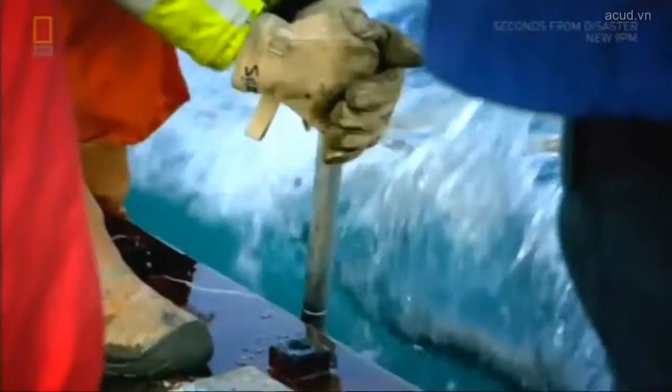Your next vacation may be spent in a paradise you've never heard of. You'll just need a way to get there. Here's the catch. That way has to go underwater. It would become the deepest immersed highway on Earth. Oh, they also have to build a couple of bridges. And did we mention the typhoons?

These tugs are towing a contradiction. A tunnel segment that's both colossal and fragile. Come back, close. You slow down. A raft of techno breakthroughs and untested results. Bound for a place few know, to entice the world to visit. And even sway the choice for the Olympic Games.

Busan is South Korea's second largest city. 4.2 million people. Bigger than Madrid, closing in on Milan, and as hectic as Manhattan. South Korea is an Asian tiger, and Busan makes it roar. Its skyline will soon include one of the world's tallest buildings.

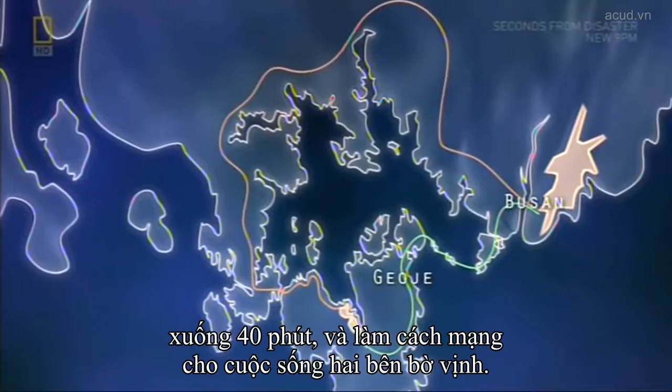The solution will slash travel time from nearly half a workday to 40 minutes and revolutionize life on both sides of the bay. The Busan-Geoje Fixed Link. A 4-lane highway that runs nearly 50 meters beneath the sea. Then it leaps across 2 colossal cable-stayed bridges. Altogether, longer than 80 football pitches. One of the biggest infrastructure projects in the world.

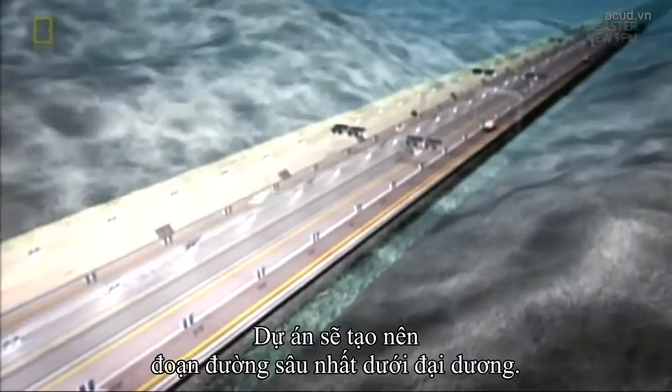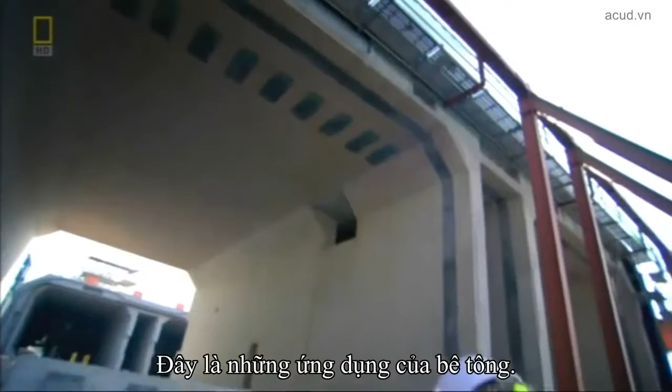Plunging 48 meters below sea level, the link will boast the deepest immersed roadway in the world. The tunnel will be composed of 18 mammoth segments, each as long as 2 football pitches and as heavy as an aircraft carrier. Wide enough to carry 2 lanes of traffic each way, with an access tunnel between. That's the concrete reality. Now, here's where it gets dicey.

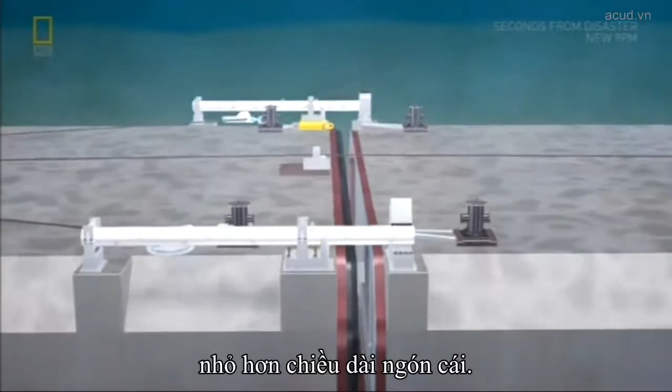Each segment has to be carefully towed into position, then carefully sunk to the seabed. And all the segments have to align within 35 millimeters, less than a thumb's width. Weather adds its own demands. This site is exposed to the open sea. There are always high waves, and the water is deep as well.

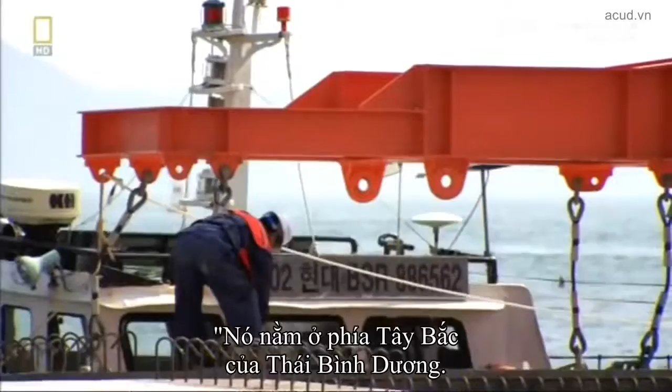It is wide open to the Northwest Pacific Ocean, so we have extreme exposure conditions for the construction period. So we've got to be ready for whatever that sends us, like big swell waves, strong winds, and even the occasional typhoon. Building a tunnel like none ever seen will take techniques like none ever tried.

Yet the Koreans have never built an immersed tunnel. But this country has. The Dutch have 5 centuries of experience at holding back the sea.

Afzinken van tunnels. Tunnel immersion is actually a Dutch speciality.

If you look at the number of immersed tunnels in the world, most of them are in the Netherlands.

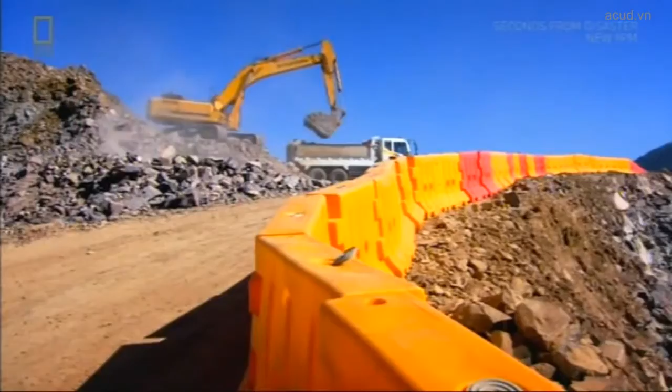Construction begins with the tunnel entrances. One on Gadeok Island, the other near an uninhabited island. From here, engineers will dig down to 12 meters below sea level to meet up with the undersea tunnel segments. But they won't tunnel through the seabed itself. If they did, the gradient would be too steep for driving. Instead, Peter's crew will lay prefabricated tunnel segments on the seabed.

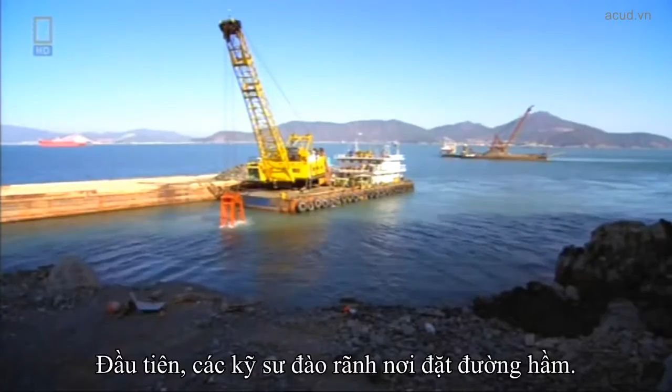First, engineers dredge a trench where the tunnel will rest. To buttress the foundation, they bore concrete columns into the seabed, stopping 3 meters shy of bedrock. The reason? Earthquakes. Avoiding bedrock will give the tunnel crucial flexibility. The segments will rest on a bed of gravel to ensure an even surface.

Because the bed determines the exact height of each tunnel segment, the gravel must be placed with pinpoint accuracy. Later, the entire tunnel will be covered with thousands of tons of crushed rocks to protect it from collisions with ships or anchors.

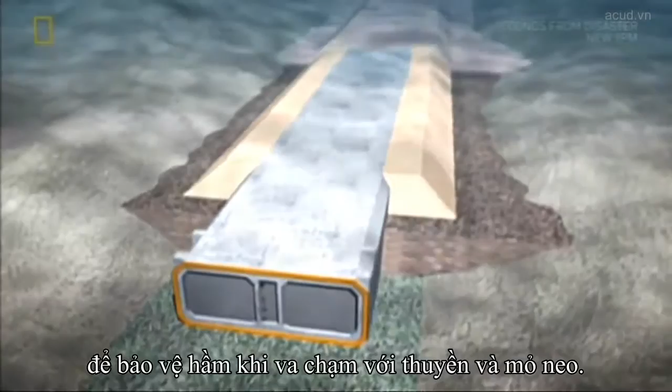Because the tunnel segments will be prefabricated, the first challenge is finding land for a construction yard. Not an easy task in Busan. If you look around, there's not a single metre of flat land anywhere that a contractor can use as a base for the construction period. From the tunnel site, the closest spot lies 35 kilometres away. It's big enough to build up to 5 tunnel segments at a time.

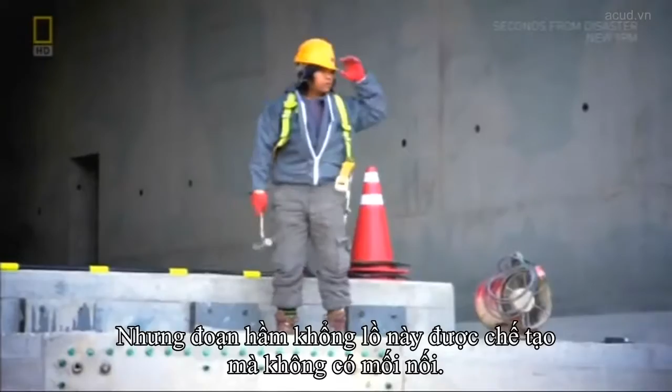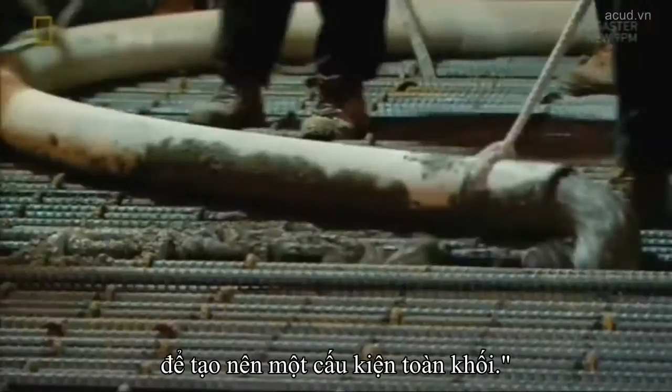Each segment weighs about 48,000 tonnes and is made of 8 subsections, each twice as long as a London bus. Anyone with a basement knows water can penetrate concrete joints, potentially disastrous in an underwater tunnel. But each giant section is cast without a single joint, thanks to Korean ingenuity. We continuously poured full sections from the ground up to the top of the walls to eliminate gaps in the walls. A process lasting 24 hours.

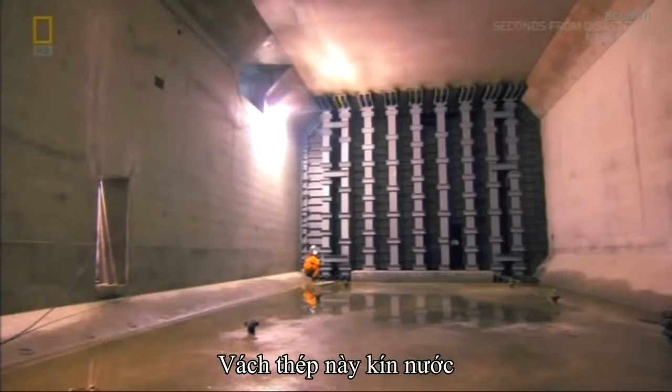After casting, the ends are sealed with steel bulkheads, a Dutch innovation best appreciated later on the bottom of Jinhae Bay. The bulkheads are watertight because these babies are about to take a bath. Flooding the dry dock will allow them to float the segments out to sea. The inundation of the dock takes approximately 48 hours.

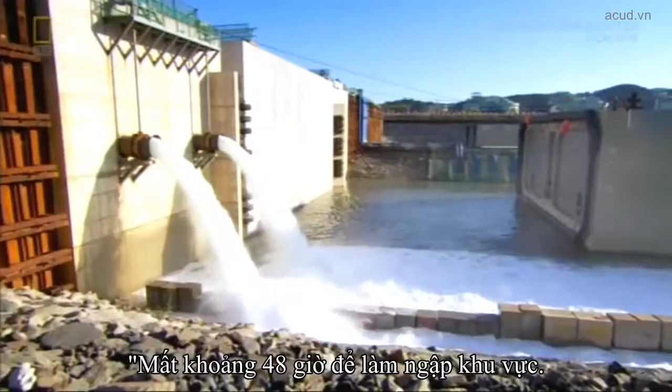During the first phase, we let in water until it reaches the level of the bulkhead door. Then we'll check to see if the bulkheads are leaking. Once all the leaks are repaired, or if there are no leaks, we'll fill up the dock completely. It's enough water to fill 230 Olympic pools.

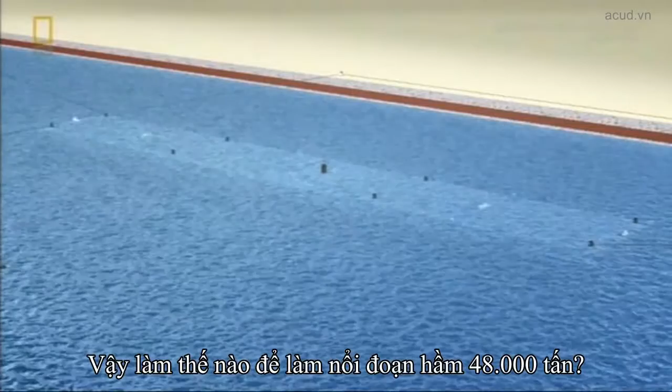So how do you prep 48,000 tons of dead weight to float? Inside every tunnel segment, there are 6 ballast tanks, and they're filled with water.

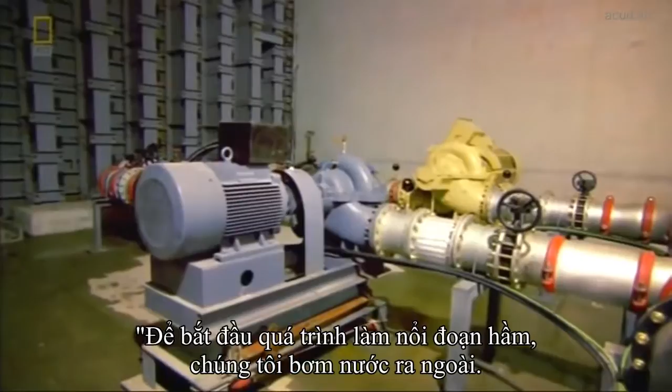To start the flotation process, we begin pumping out the water. We continue until the tunnel segment starts floating. So what the tugboat has to do is to tow that slow. Then with the other winches at the backside, we control the tunnel element sideways direction. Now they can begin to warp out the segment.

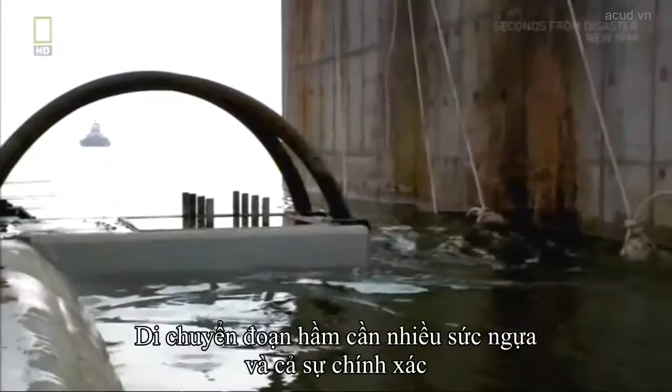Removing the first segment takes brawn and finesse to avoid colliding with the dry dock. With barely 2 meters on each side, there's no room for error.

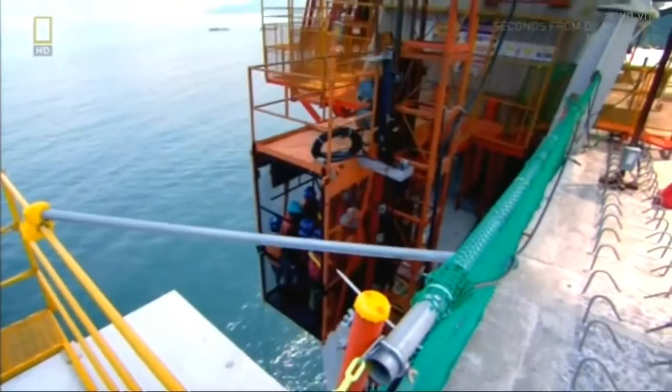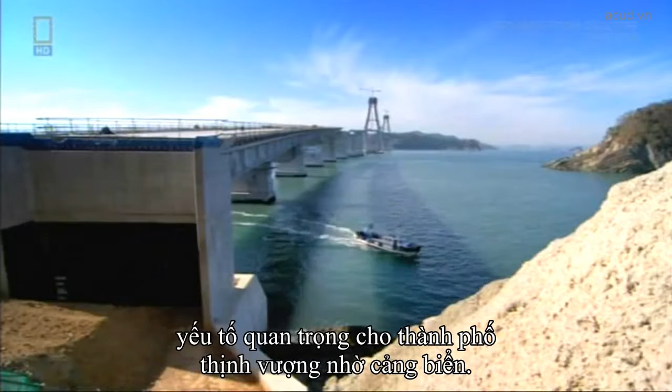At its topmost, the 2-pylon bridge will soar 156 meters above sea level, the height of a 50-story building. The span between the pylons will stretch the length of 5 football pitches, with enough room for the tallest freighters to pass under. Crucial for a city that thrives on shipping for its livelihood.

The most pleasing aspect of the bridge is also the most daunting: its curved diamond shape. Of course, curved pylons are very difficult to construct, but they're very much in harmony with the surrounding scenery in many ways, in that they bear resemblance to a mother's praying hands and to the wings of seagulls.

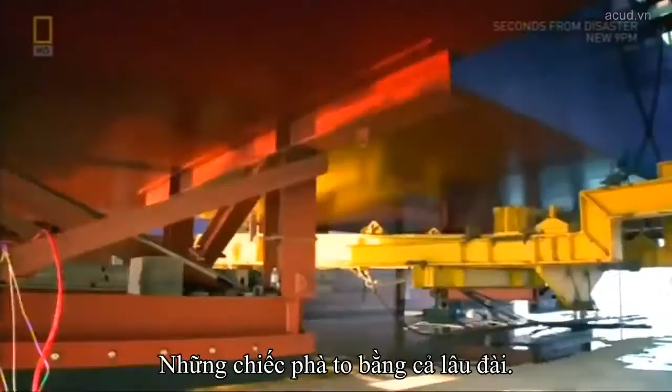35 kilometers away, the first 5 tunnel segments arrive at a temporary mooring site. From here, they'll travel across Jinhae Bay to their resting place on the sea floor, already leveled and lined with gravel. And here's how they'll get there. Pontoons the size of a mansion. Dutch designed, Korean made. One pontoon is positioned near each end of the tunnel segment.

After arrival at the tunnel site, mammoth winches on pontoons will lower the segment to the seabed. At least, that's the theory, because it's never been done in the open sea. A specialist diving team prepares the first tunnel segment for the immersion operation. Divers test connections for data systems and power supplies. Standing by. And remove marine growth from the bulkhead.

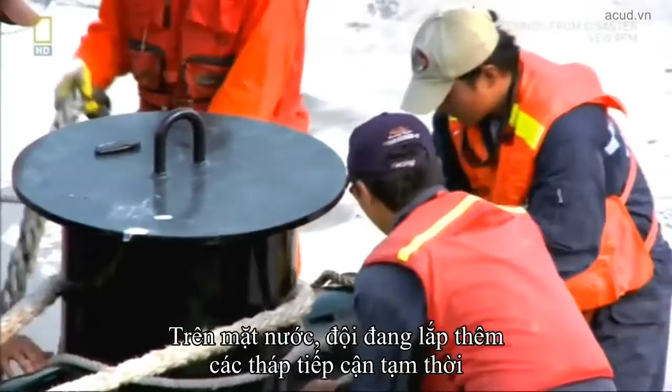Down on the wire, please, Steve. Down on the wire. Finally, they install steel wires underneath the tunnel segment, crucial for positioning during immersion. In a good position now, we can come up on the wire. Coming up on the wire. Above water, the crew are also adding a temporary access tower, so workers can enter the segment in case of trouble with the ballast tanks. Over, the tunnel is cleared.

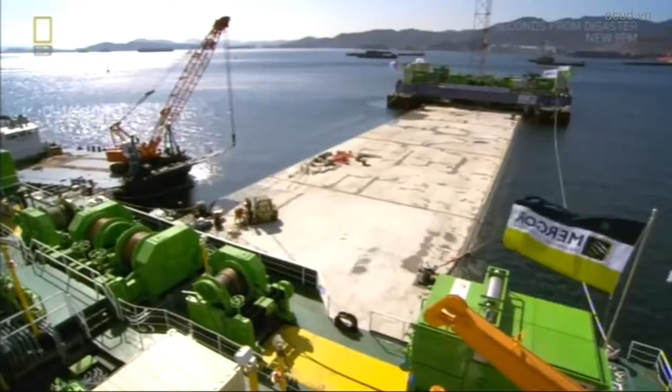Every problem has to be anticipated, because if things go south, they won't get a second chance. What we do doesn't have anything to do with luck. We know what's involved, we know how the process works, and we have the feeling we control the whole process. Not quite. Back in Holland, the rest of the immersion team stands by to fly out. In all, 56 men wait for Peter to say go, and he's waiting for a forecast.

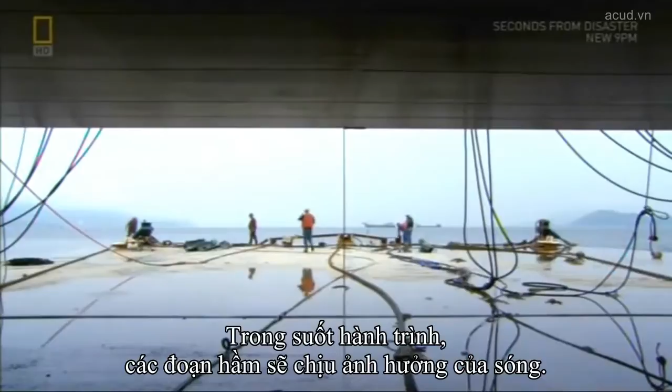When the wind blows from the south, swells roll in from the Pacific. Because we're situated offshore, we have to deal with waves. And these waves can be pretty fierce. Even swells barely 30 centimeters high pack so much force they could fracture the subsections that form the tunnel segment. Throughout its journey, the segment will be at the mercy of the waves, so the team needs 3 days of calm seas.

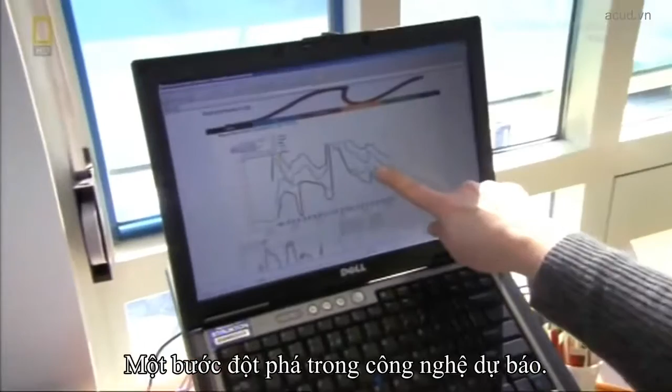Strukton looked around for a forecaster, but few dared to stick out their neck for such a costly guess. Then, a Danish company seized the challenge. They came up with a model to predict waves as small as 10 centimeters, up to 5 days out. A stunning breakthrough in forecasting. That means we're able to say, tomorrow we can do an immersion. And that means we're able to put people on the plane yesterday, really on a last-minute basis. It takes away a big risk for us and for our client.

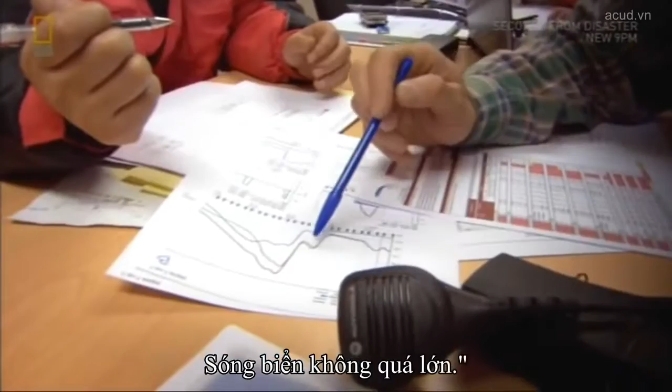We've got the weather. They're all showing the same prediction. The swell still not as bad. I would say we have a go. Green light. We'll try. We'll try, right? Okay, thank you. Yes, bye-bye. Ahead lie 48 hours of tension for the boss. 6 months of work rides on steel threads and a forecaster's guess. Tonight, no one will sleep soundly.

After a cautious voyage at 3 kilometers an hour, the first tunnel segment arrives at Gadeok Island, the starting point of the tunnel. Joining Peter is the elite team fresh from Holland, among the few men on the planet who can do this job.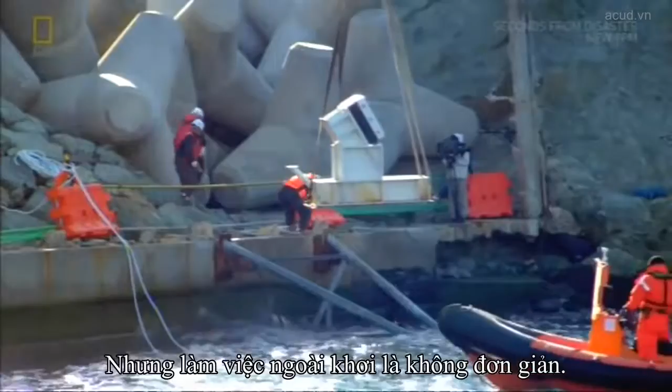But working offshore poses a huge challenge. 48,000 tons have to be maneuvered into a slot with just 1 meter of clearance underwater on each side. One false move and the segment could get jammed in the rocks. Controlling the segment are 14 steel cables, anchored in the rocks and on the seabed.

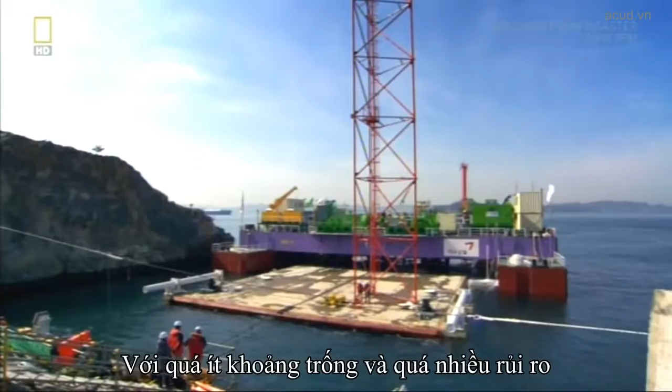Aligning the segment takes painstaking accuracy. Surveyors take readings using a system of prisms and mirrors mounted on the access shaft and the survey tower. It's all new to the Koreans, so it takes time getting used to the technology. The ordeal will take all day and end either with an engineering triumph or a 48,000-ton disaster. With so little clearance and so much at stake, the segment moves at a snail's pace. After a journey of 35 kilometers, it's now just 4 meters from the abutment.

We've worked really hard for a half a year to prepare for this moment. 56 of our people are here to execute this operation. The Koreans are excited and tense because they've never witnessed this. We've done it more often, but still, a very special moment.

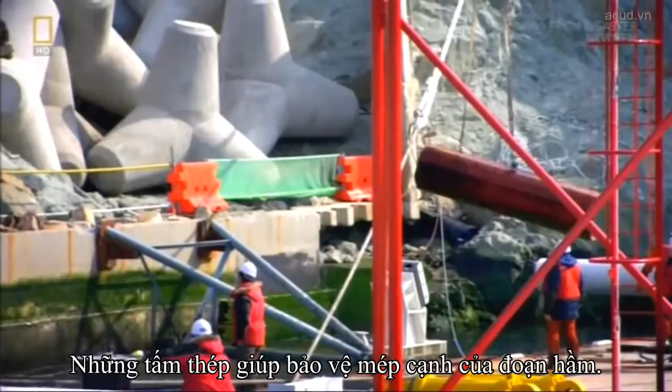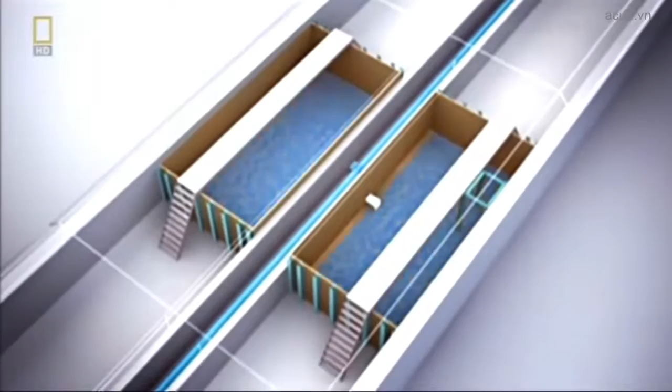Till now, steel plates have protected the leading edge of the segment. Ease down. Behind them is a component as crucial as it is fragile: a rubber gasket to ensure a watertight connection with the abutment. Now they're ready to begin the descent. Operated by remote control, the ballast tanks slowly fill. The command post monitors everything via remote control cameras, on the pontoons and inside the tunnel segment.

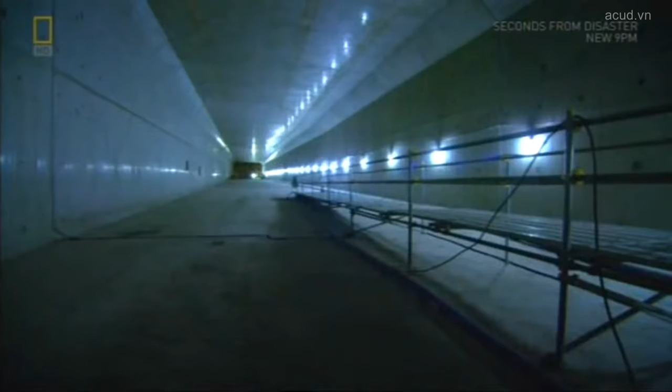7 hours later, touchdown. The segment now rests just 50 centimeters from the abutment, the mouth of the landward tunnel. To close the gap, engineers have installed a pair of powerful hydraulic jacks. Linking the jacks and applying tension closes the gap. The final stage begins from the landward side.

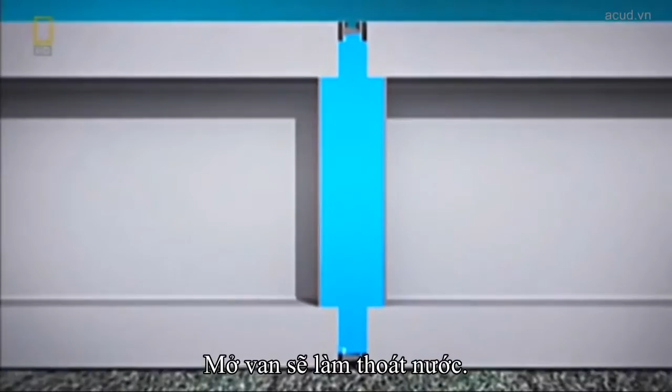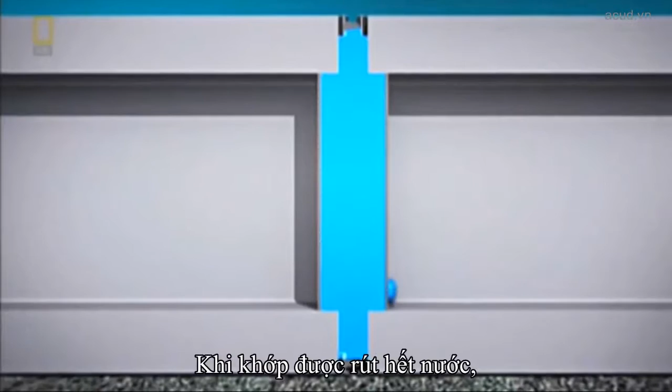A wall of water nearly 3 meters wide separates the segment from the abutment, what they call the immersion joint. Opening this valve will force the water out. As the immersion joint empties, external pressure will further compress the gasket for a watertight seal. The echo from the bulkhead reveals the water level in the joint. With the water drained, they can open the bulkhead door.

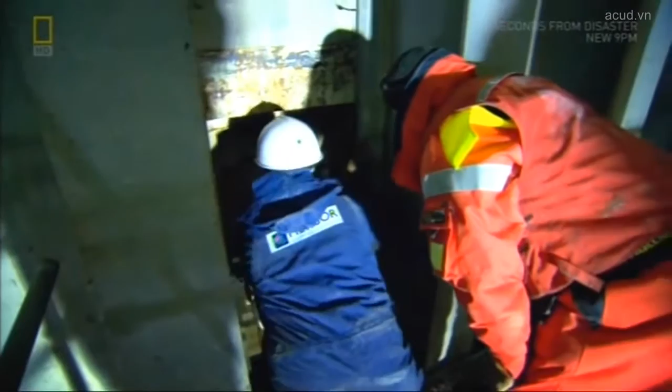But the lock's jammed. You knew that it was going to break? Huh? Did you know that? Because you took your toolbox with you.

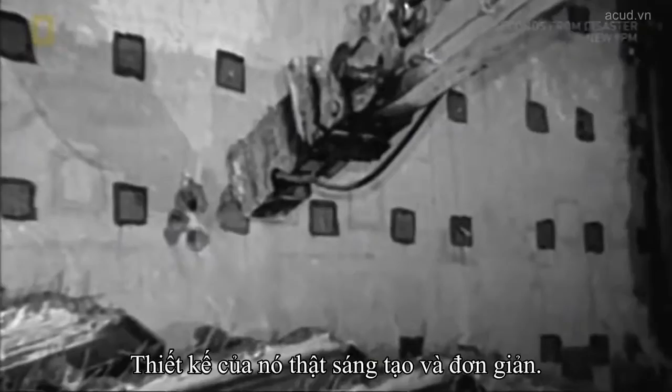This calls for cruder technology. All that stands between the crew and the first immersed segment is the steel wall installed back at the dock. And here is why it's so brilliantly simple. On other tunnels, engineers seal the ends of segments with concrete, then knock it out after immersion. But that takes time and creates debris.

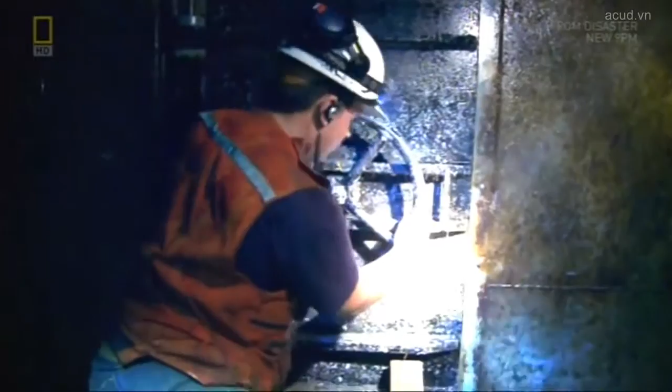The modular steel bulkheads are easy to install, easy to remove, and they'll be reused on every segment and eventually recycled. Faster, cheaper and safer. An engineering trifecta. Finally, open sesame.

Although we experienced some unexpected things, we were very happy that it was completed successfully in the end. And the feeling of accomplishment was indescribable. Congratulations, Mr. Two. Their marathon operation lasted almost 78 hours. Some have gone 2 days without sleep. 1 down, 17 to go. And they won't all go smoothly.

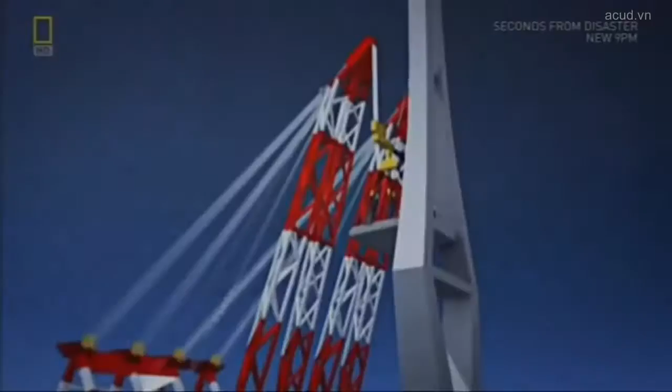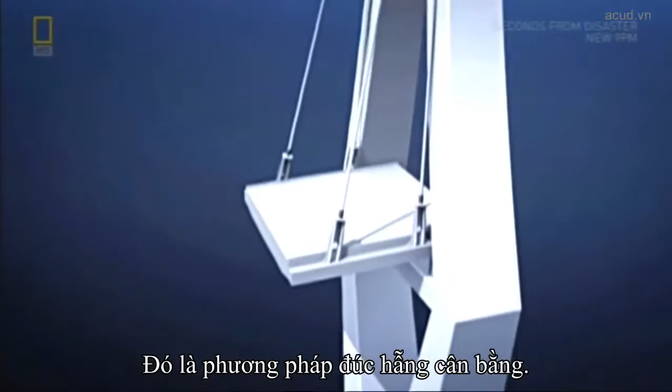Like the Busan Tunnel, the bridges advance in segments, but 2 at a time, not 1. It's called balanced cantilever construction. Working outward, steel segments are laid on each side of the pylon to keep the bridge in balance. Then 2 cables are attached to brace the segments. Once they've done that, the derrick crane then lifts up 6 precast concrete panels and places them onto the steel frame.

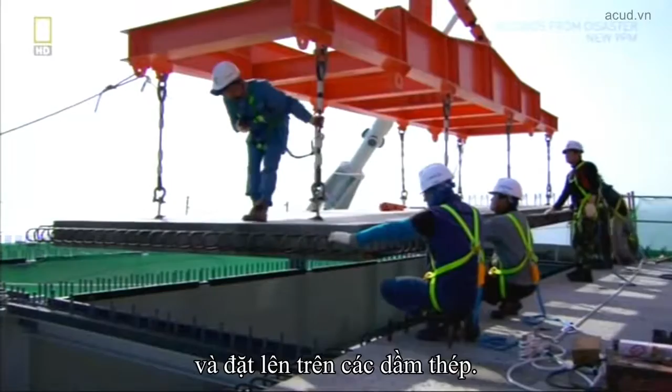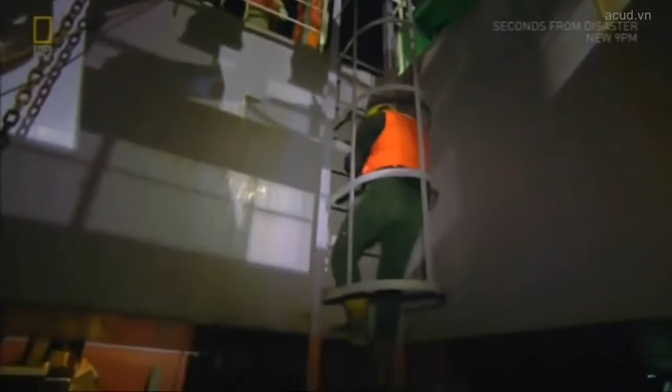Then put a final post-tensioning into the cables. And we're ready then to start the whole thing over again. Back at the tunnel, the team have installed 12 concrete segments. But now they're heading for 48 meters, the deepest water and the hardest challenge.

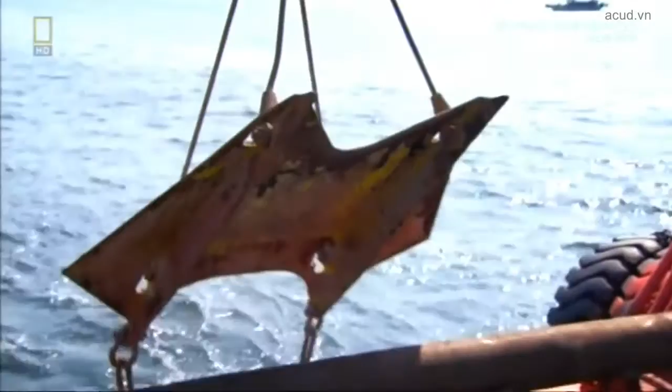The sea floor out here is soft clay, so they need to set anchors that can hold the segment and pontoons fast. Stevmantas, named for their fish-like shape. They're designed to dig in where other anchors lose their grip. Once segment 13 arrives here, 14 steel cables connected to the anchors will hold it in position. But once again, deep water raises the stakes.

Once the segment hits the bottom, suppose a problem arises with the ballast tanks. Somehow, Peter would need to get the engineers inside. On segment 1, they could use an access tower, but not in deep water. The solution is a first in tunnel immersion, a self-propelled diving bell. Purchased in America, the sub was refitted just for this project.

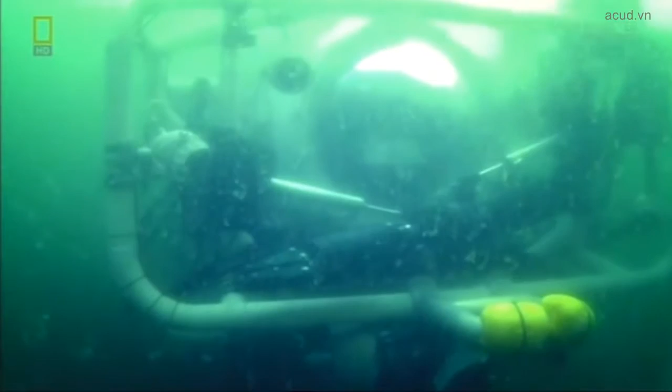I'm coming down to 15 meters, see if we can get the tunnel on sonar. This is the tunnel element here. That's something, probably a bollard on the corner.

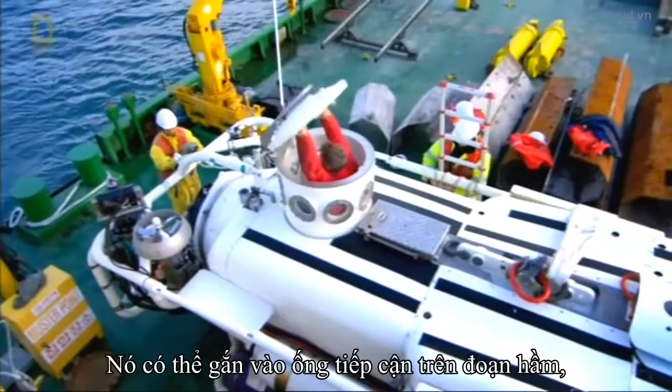With a little boat like this that can go to 300 meters, you've got the concept of a ferry transferring people to the tunnel segment. It's 9 meters long, with room for a pilot, co-pilot, and 5 engineers. It can dock on an access tube on the segment for watertight access to the tunnel.

Deep water poses another problem: monitoring the position of the segment as it's lowered, because one misalignment would be disastrous. To calibrate the position of the first segment, surveyors took readings from prisms mounted on the access tower. But remember, there's no access tower here. So once more, the Dutch devise a smart, simple solution. It's named for what it is.

A taut wire. One end attaches to the leading edge of the segment to be immersed. The other end attaches to the previous segment. The taut wire ensures the connection stays under high tension. Positioning the device is a delicate operation. This custom-made model is the only one in existence. Breaking it is not an option.

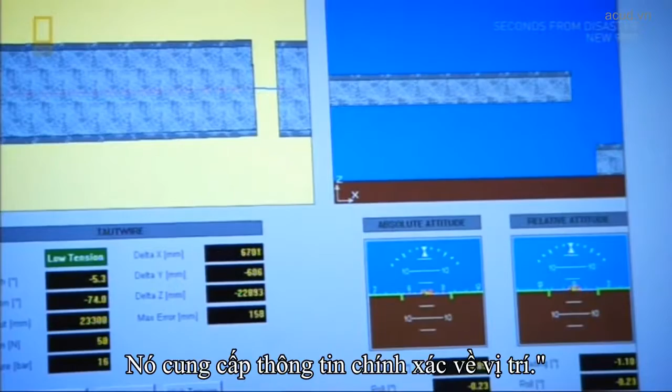When this segment descends, a computer will record the length and angle of the wire, allowing the team to monitor the segment's position. The taut wire is now under high tension between this segment and the previous one. And as the segment descends, the wire automatically retracts and becomes shorter. So that provides us with exact positioning data.

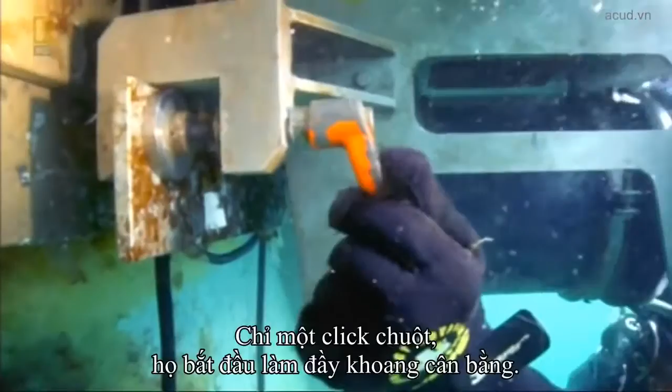To fine-tune the position of the segment on the seabed, 4 of these sensors are attached, one on each corner of the bulkhead. Another custom innovation for this project. And wait till you see how accurate they are. The whole operation is remote controlled from the command unit on the pontoon. With one click, they start filling the ballast tanks.

You can feel the tension building up now. And then we all have one question. Can we do it again? Can we get it in position? It's the same tunnel, but it's farther away from the coast. It's deeper, the weather, everything. So many aspects make it different every time, so you have to stay alert.

All the data feeds into Peter's computer and refreshes the position of the segment every second. This is the tunnel where we have to go to. The green one is the final position, and this is where it is now. So you can see it's just below sea level.

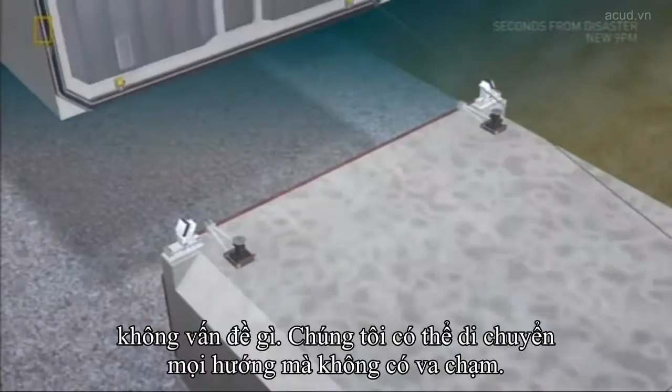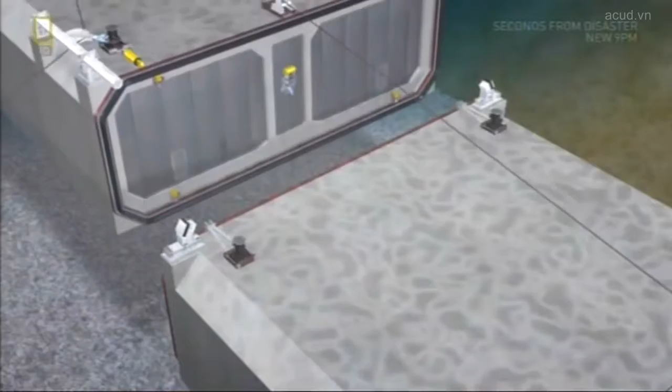The first step in joining the segments poses another challenge and another solution. The moment a tunnel segment approaches the one ahead of it, it's moving because of the swell. So we install 2 guide beams on the top end of the segment. Another simple but elegant solution. The moment we pull them closer together, the guide beams become less flexible. The movement diminishes until the segment is motionless.

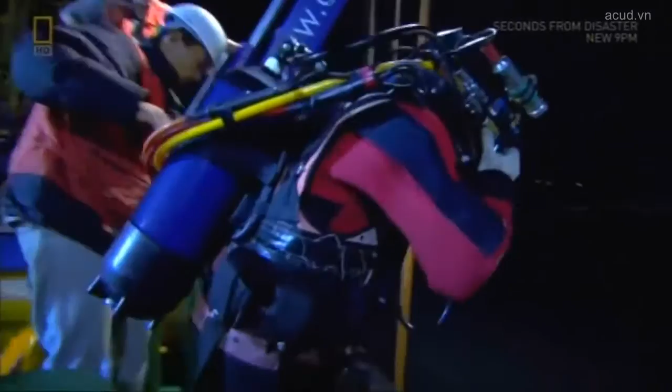With only 50 centimeters separating the segments, and in near zero visibility, a diver connects the hydraulic jacks. The segments seem aligned, yet the slightest error on this end will translate into a big mistake at the other. But the Dutch don't miss a trick.

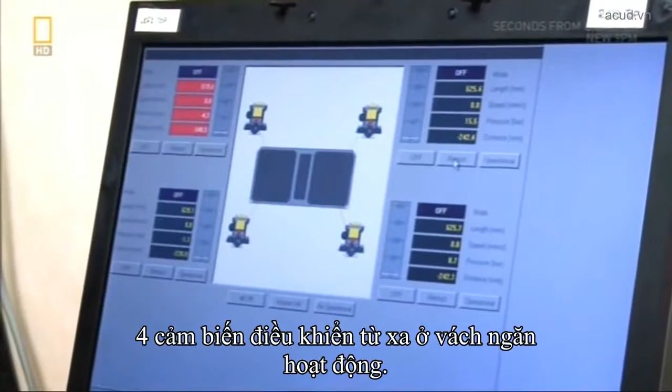The 4 remote-controlled sensors on the bulkhead now deploy. They measure the position of the segment within 1 millimeter, the width of a guitar string, and relay the data back to the command center. Peter needs to shift 48,000 tons of concrete, 20 centimeters to the right. Even on calm days, the swell is so heavy and the segment is so long, stability is a problem.

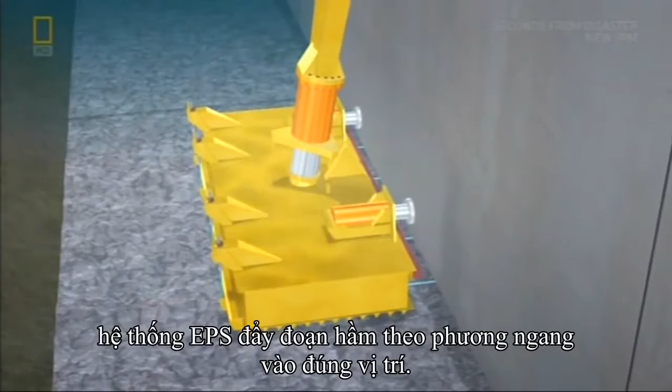The solution? The External Positioning System, or EPS. Yet another Dutch invention based on a simple idea. A pair of hydraulic legs and extendable feet to hold, lift and move the segment. Connecting each pair of legs are 4 steel cables, already installed back at the mooring site. Braced on its robot legs, the EPS laterally aligns the segment into its correct position. Now, the jacks are tightened by remote control, compressing the rubber gasket.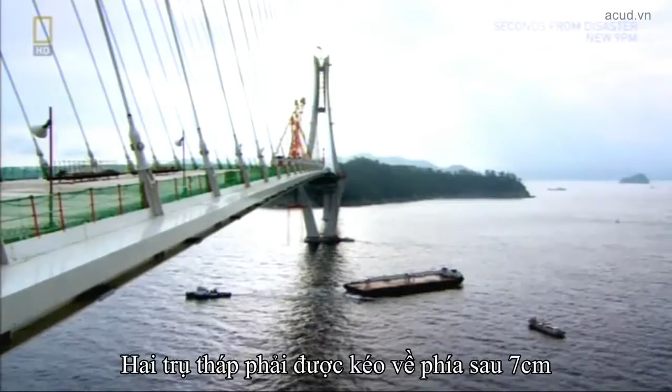Done. One more segment complete. Like the tunnel, the bridges approach the final stages. Before the 2-pylon bridge can accept its last section, engineers have to perform a stretching exercise, as tiny as it is powerful. Both pylons have to be pulled back about 7 centimeters to create enough space for the key section to be placed.

Once the tension is released, the final section will have a tight fit. After 6 years, they must be eager to finish. But just like the tunnel crew, they have to move in baby steps. Because this baby is a giant.

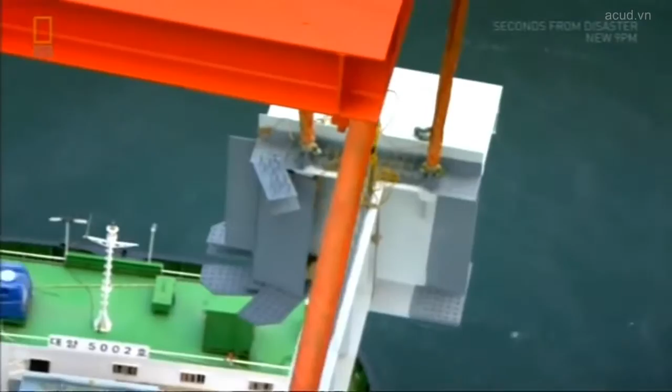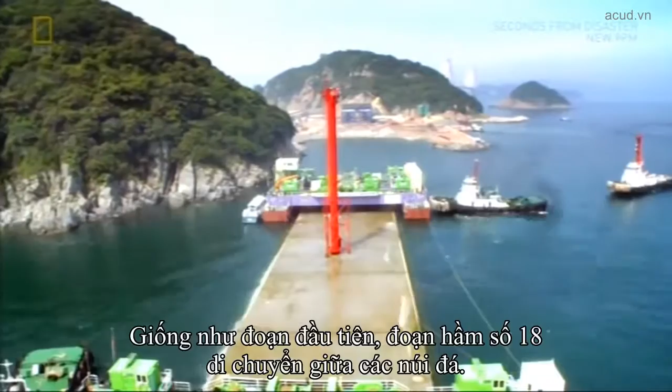A few kilometers away, Peter's crew prepares to install their last segment. Just like the first segment, number 18 has to be maneuvered between rocks. As before, they run some of the anchor lines from the pontoons to the rocks. Because it's so close to the island, it's very difficult to install the immersion wires. Connecting them isn't easy by any means. It's not just a matter of simply pulling them in place.

With all cables attached, they can start maneuvering the segment into place. Because this segment is extremely heavy, we can't afford even a small mistake. Light contact can cause huge damage to the segment, and that kind of damage can set back the entire project. After 3 years, they'll open the last tunnel segment tonight, if all goes well.

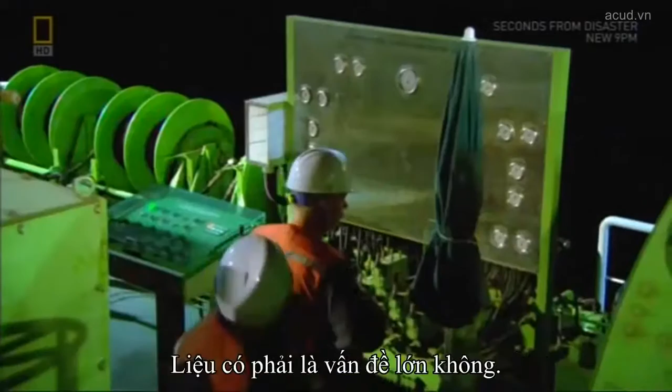The segment hits the bottom, but there's trouble. One end is sitting 28 centimeters too high. We're now trying to figure out what the cause is. We don't know yet. It's a major problem at the moment. We're taking about half an hour to go through all the steps so that we don't miss anything, and then I'll inform you about the situation.

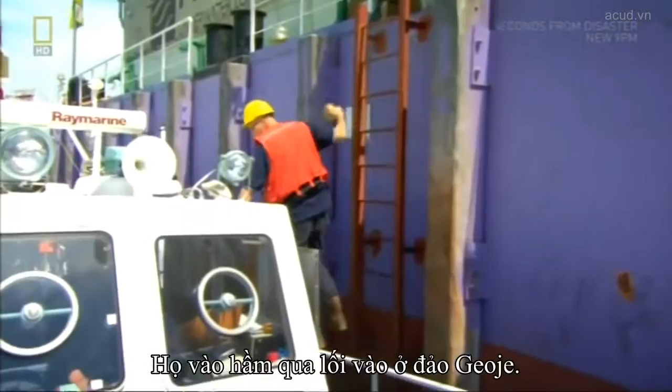The gravel foundation under one of the EPS feet is overbuilt, so they'll have to remove the foot. And the grand opening will have to wait one more day. After final adjustments, the last tunnel segment now sits squarely on the sea floor. All that's left is entering the tunnel to seal the joint with the final segment. They'll enter via the tunnel entrance on Geoje Island. It's the last time Peter will make this trip.

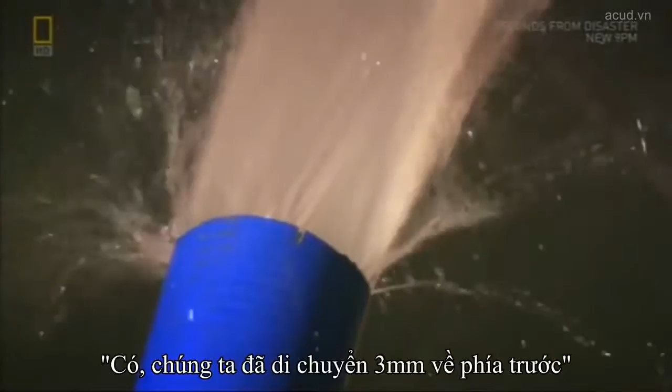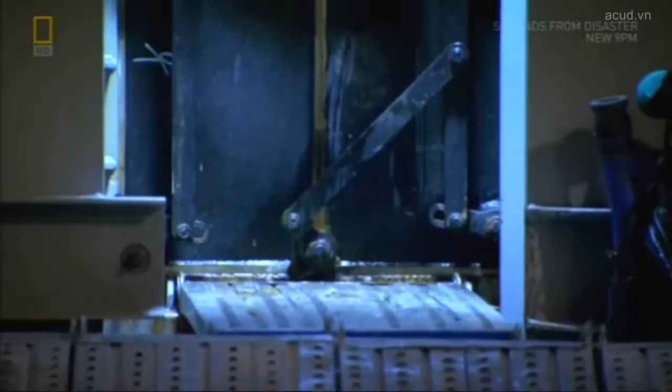They always celebrate this step, but today is the grand finale. Once complete strangers, now firm friends, and soon to go their own way. The end of their long journey lies behind this bulkhead door, and the honor of opening it falls to Peter.

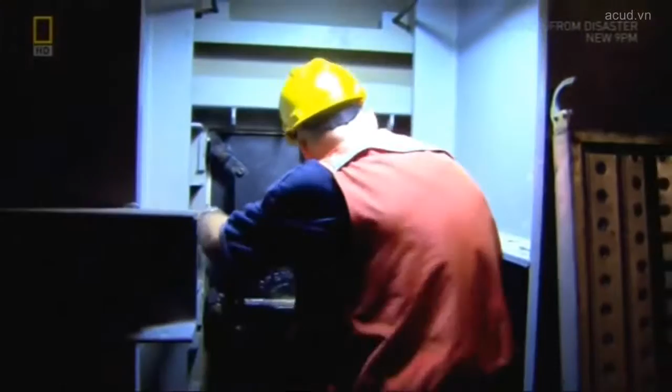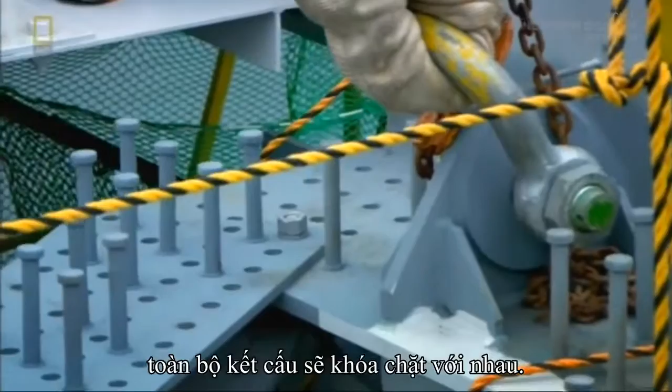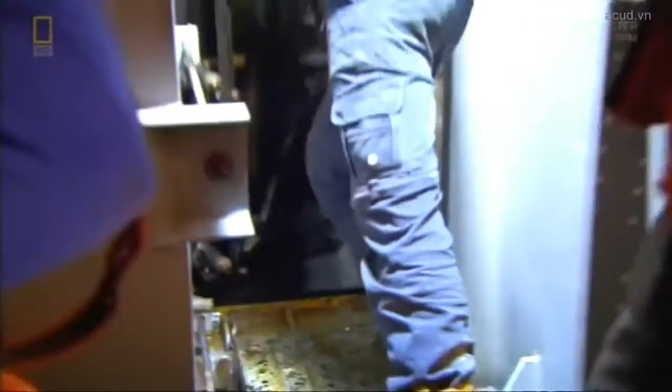Back at the bridge, the final section is lifted into place. Once the tension on the towers is released, the whole structure will be locked in place. With the bridge complete, all that remains is opening the final segment of the tunnel. Last inspection.

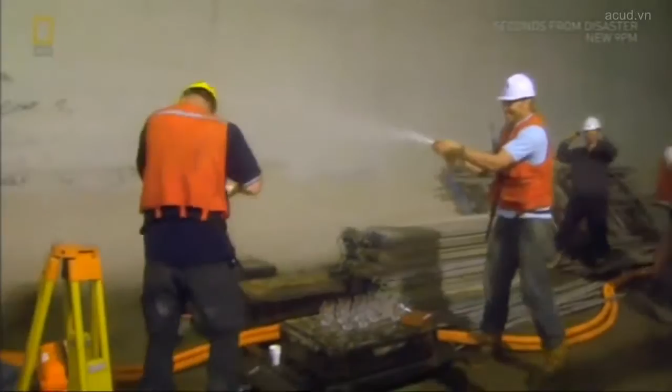Really extremely proud that we did it, and happy, of course. Happy for the whole team. It's just great. After all this time and after a difficult operation, we did it. Very emotional, yes. Fits the moment. And proud. So proud. Yeah.

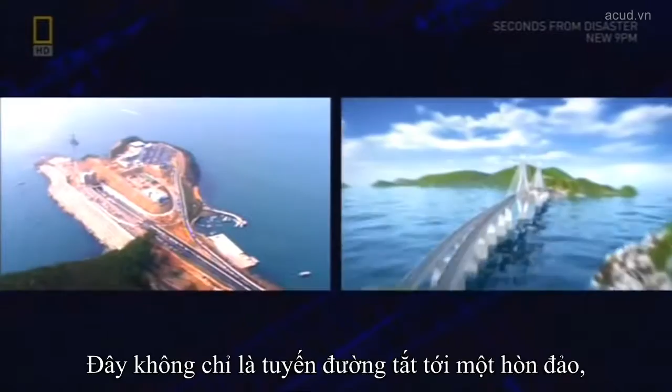For Peter's team, the tunnel marks another success on a stellar resume. For the Koreans, it's a chance to join the Dutch on the world stage. Actually, this was the first immersed tunnel project in Korea. And we developed lots of new equipment, and we trained lots of engineers, and eventually we could finish in time, and everything is happy. This isn't just a shortcut to an island. It's a path to the future. And who knows where that leads.